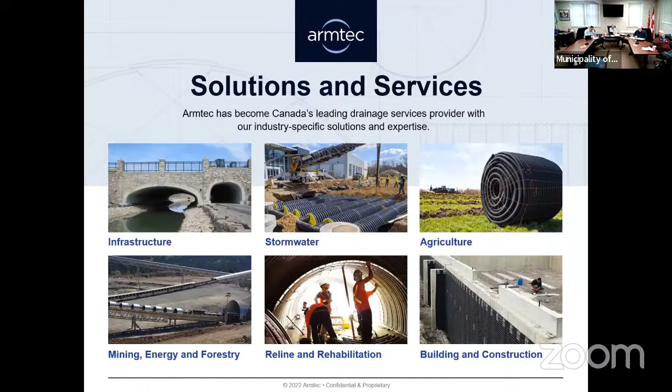So we'll get right into things. I took a look at some of the bridges you've got there. These ones stood out as bridges where maybe we could help with corrugated steel structures, either as replacements or rehabilitating them. There's going to be a couple categories: the rehabilitation side, the new side, both with corrugated steel products, and then we do have a prefabricated steel girder bridge. I'll go through one of those examples near the end. By the way, if you have any questions during this, you can ask.

Okay, so these are the ones, and you can see the spans are not that big, and the ratio of span to rise is such that the rise is not so small compared to the span - it's not like a long, very low bridge. They're ones that are a little bit higher. That's because of the product that we have.

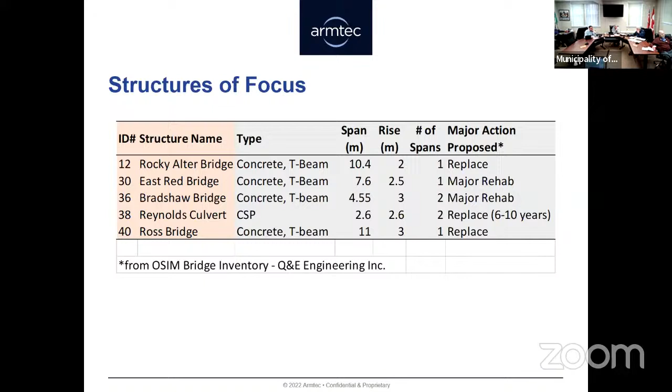So let's get into these products. This product here is called Bridge Plate. It's a corrugated product - basically the steel is corrugated, bent to a certain radius, and holes are put in prior to that. Then these pieces are bolted together to form a shape, and they can be bent to different radii to make different shapes.

So today, I'll mention that later. The different coatings, galvanized to the left and polymer coated to the right, are mainly about design service life. The polymer one is more expensive than the galvanized. The life expectancy depends on the environment, so I would recommend doing water testing at the site - there are different parameters like pH, resistivity, and chlorides that influence how long the structure will last.

Generally, one lasts twice as long, or you'll get a third longer life out of it - out of one versus the other. Our engineering department will design galvanized to last about 75 years, and if I ask them for a polymer coated one, they would do that too, but again it also depends on the site.

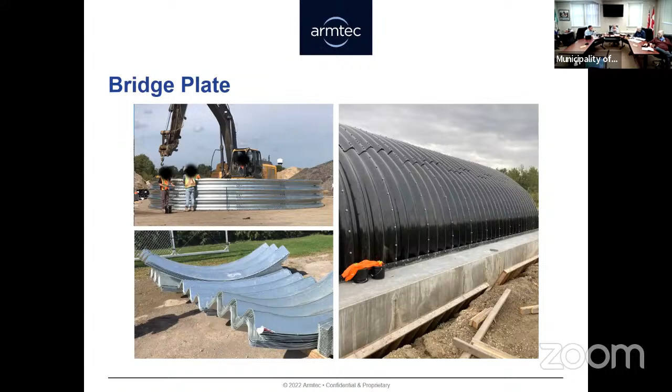This is totally above my head right now, I'm going to be quite honest with you. What does that mean when you say that? Oh, sorry, you know what, jump to the next one there. Sorry.

Galvanized to the left, polymer to the right. And steel - you can see the head wall is perpendicular to the structure, just on the face, and then the wing walls come at an angle. So yeah, steel sheeting, we can design and supply that. I'll show you an example, maybe that exact example later on. So let's go to the next slide.

So we have a number of different corrugated products, but that one I just showed is bridge plate, and it's the largest corrugation that we offer. On the right you can see DCSP and SPCSP - the bottom one is that bridge plate, and the one on top is multi-plate. Those designations are just in the bridge code - bridge plate is deep corrugated structural plate, and multi-plate, which I'm not really suggesting for these ones, but it's a product of a similar nature, under the structural plate corrugated steel pipe category.

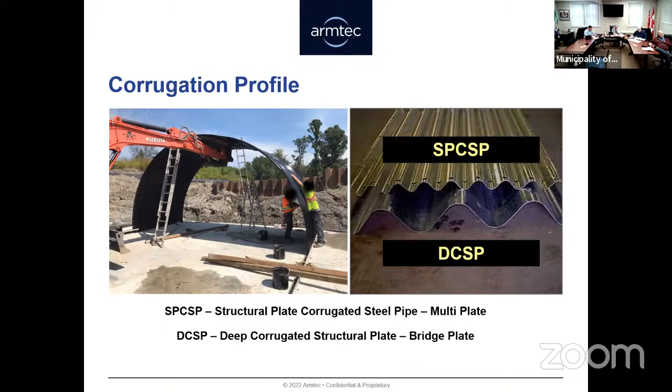And that to the left is an example of an arch in multi-plate. Anyways, let's jump back to bridge plate, the product I'm thinking about for some of these. They come in open bottom structures.

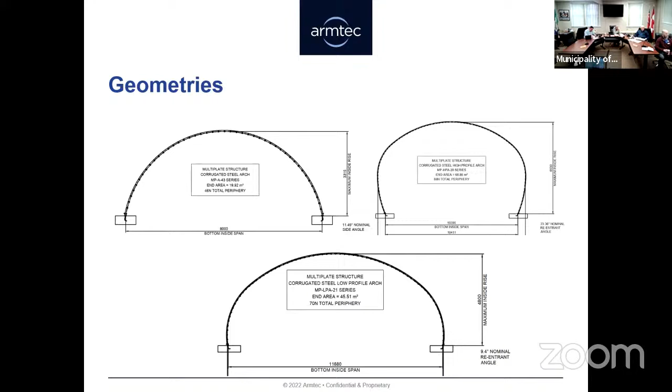So here on the top left is a single radius arch. In the bottom is a 2 radius arch - within the arch there are 2 radiuses - and in the top right there are 3 radiuses. Then there's another one which is the box culvert shape, a lower profile one mimicking corners at the top left and right, so you're going wider with a lower rise.

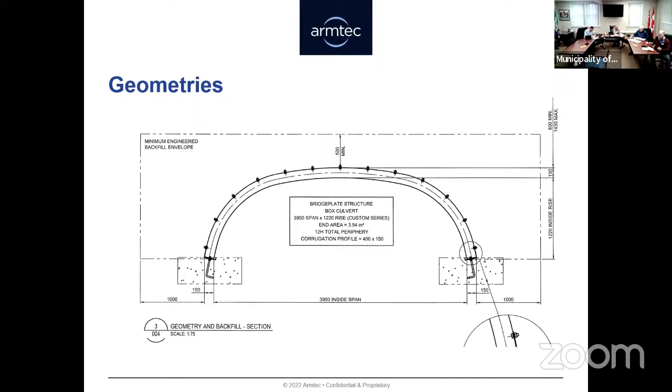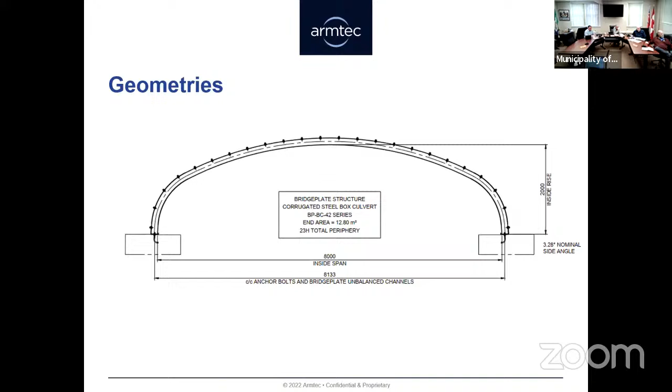So let's take a look at these bridges again. Oh sorry, yeah, where do you want to go forward? Yeah, so that's box culvert to the left versus arch to the right. Then jump to the next screen there. Sorry, I'm thinking I'm controlling it here. That's typically what happens, that's fine.

Okay, so you've got the structure names to the left there, a potential rehabilitation option - I'm not saying it's going to work, but a potential option - and then the existing span and rise. So with a lot of these, what I'm thinking is, okay, you have this structure with this span and this rise on the inside, and what if you put a structure underneath it and put concrete in between our structure and the existing one? It's kind of a strange idea, but that may reduce the cost of doing structural repairs on the soffit underneath your structure, maybe to the beams and stuff.

You'd have to make sure you have adequate foundations, because an arch needs footings. But there's potential to use just the existing footings there. So imagine putting an arch underneath a bridge and concreting it in. The other thing is, you'd still have to do guide rail and barrier repairs up above. So it's probably extending the life of the structure and reducing some repair costs.

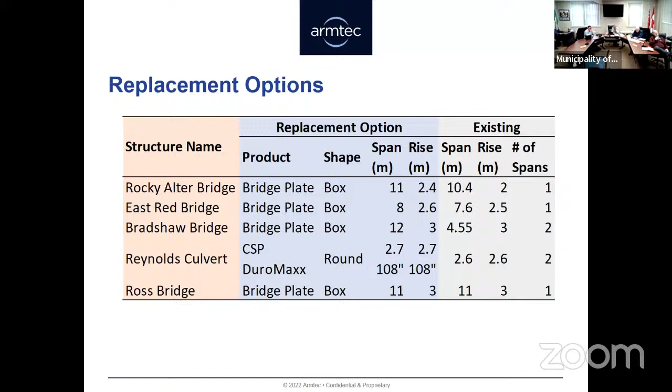Let's look at some footings. If you didn't use the existing ones, potentially we could provide and design precast footings for the foundation. We can design and supply precast. Cast in place we don't do, but we can provide the loadings for a consultant to do. We also do steel footings. But the soil below that and its bearing capacity would be confirmed by others, like a geotech engineer. So there's probably some other involvement there, almost any way you look at it with these, at least the larger ones. So anyway, precast.

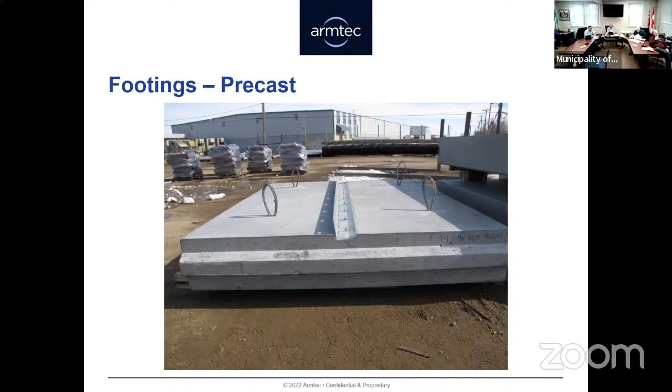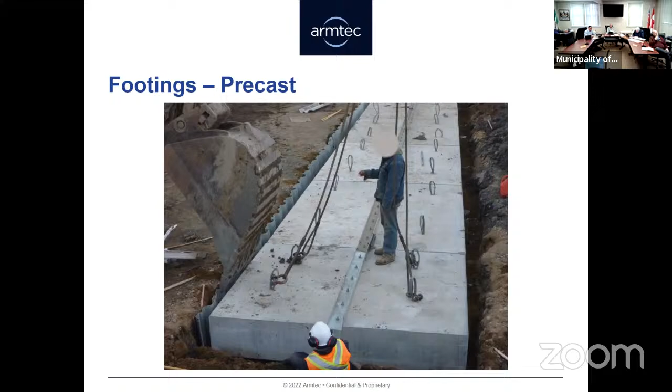So that's for a larger span, maybe 12 meters in span or something bigger. And cast in place, this is out in Banff, maybe about a 16-meter span. So that's maybe about a 12-meter span.

Precast footings, then cast in place footings with some formwork there. So yeah, that's in Banff there.

The head walls there, that's probably, if you've heard of the company RECo, like a precast panel RSS or MSE wall. Anyway, that's an option for a wildlife overpass, and there are two arches there, about 16 meters in span each. We did two of those overpasses.

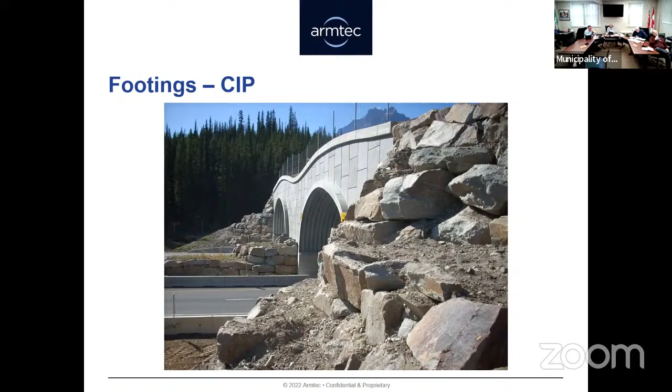And steel, you can see it a bit on the bottom right. So it's corrugated steel that is the footing, but it's not bent to a radius, just flat but corrugated, if you know what I mean. I think there was some concrete poured in there as well. This is a relatively big structure too, maybe around 10, maybe 12 meters. But again, this is if you're using new ones, and potentially you could use existing.

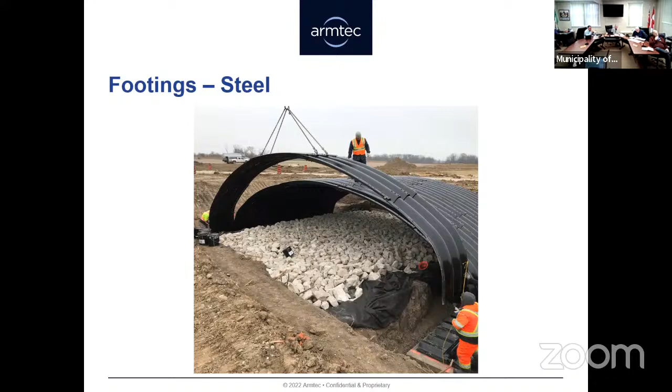End treatments, steel sheeting, I had mentioned that before. That may be a good cost-effective option.

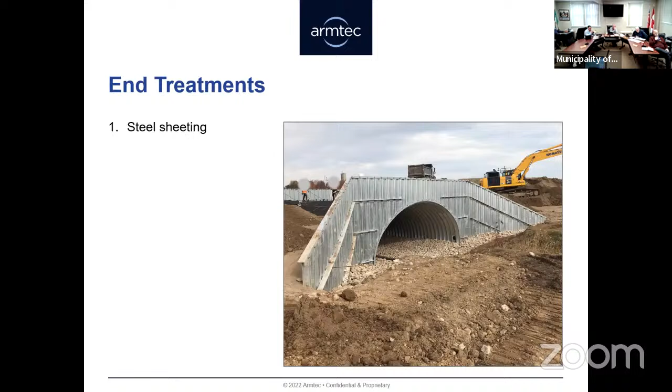Bin wall, so to the left there, not right above the structure but to the left, that's bin wall. Bin wall is like a retaining wall system, or what could be used for abutments. If you had a normal steel girder bridge, you could potentially use these bins. They're steel bins, and you fill them with granular material, and they could be used as an abutment, instead of making embankments and stuff. This is like a bin to hold material in place. We can also supply those and design them.

And then like above the structure as the head wall in that one before, yep, that's actually a bridge plate itself, but again flat, just cut to kind of go around that structure.

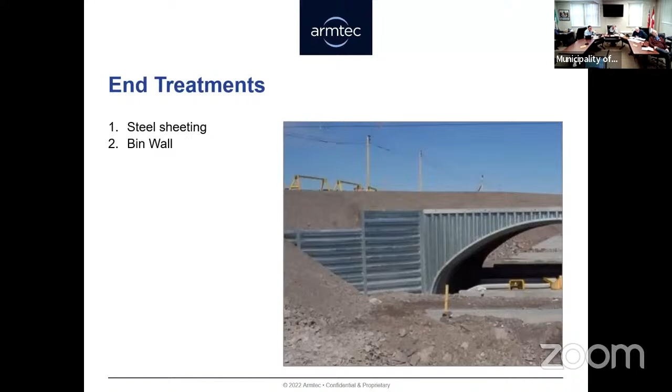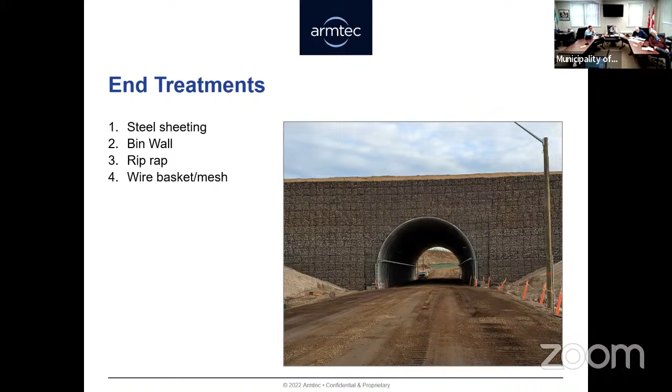So riprap probably wouldn't be used with these bigger structures, unless you want to extend the structure out. It might be a good option in some cases. A wire basket mesh wall, MSE wall - those are like wire baskets filled with stone, and then they have geogrid going back, using the soil or granular material behind the wall to keep it there.

Cast in place concrete - we don't do that, but a consultant could probably do it.

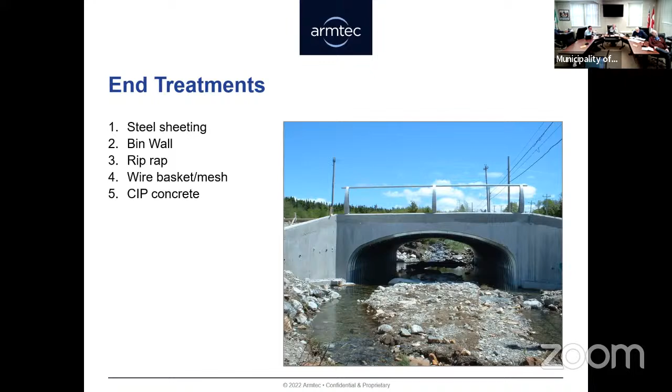Some past projects, now you get to see some of them here. So this one, we've got about a 14-meter span by about 4.8. That is a Rico wall there being used with that structure. This structure is pretty big, a large span like 14 meters, but it's also pretty high. So you can imagine the bridges you're dealing with, probably that's too high. But this is also not a box culvert shape, so a box culvert shape in this span would be lower.

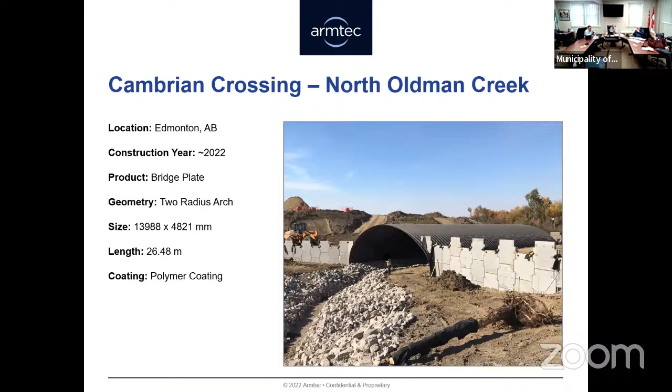Just out of curiosity, could you throw a cost behind that? I could maybe, off the... Sure, sure, okay, yeah no problem, I can pull up some old quotes and stuff. That's good, yeah, just to give us an idea of what we're looking at for some things. Thank you, yeah, no, definitely. Thank you.

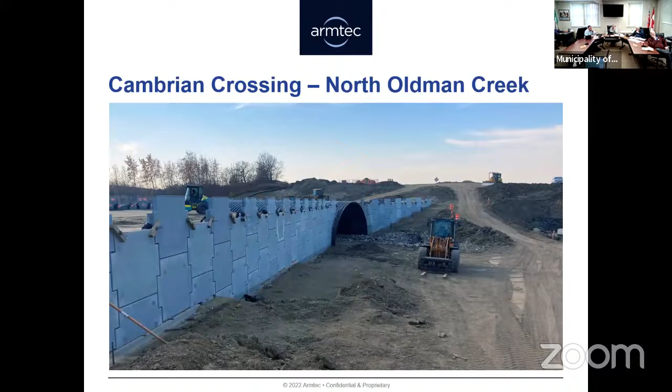You can bump to the next picture there. This was used for actually a water course crossing and a path underneath. Now the path is to the left, and this is in construction.

Okay, so we jump to one with steel sheeting there. You've seen that structure before, I think, in a previous picture or pictures. This one's again not a box culvert shape, but about an 8.8 meter span by 3.6.

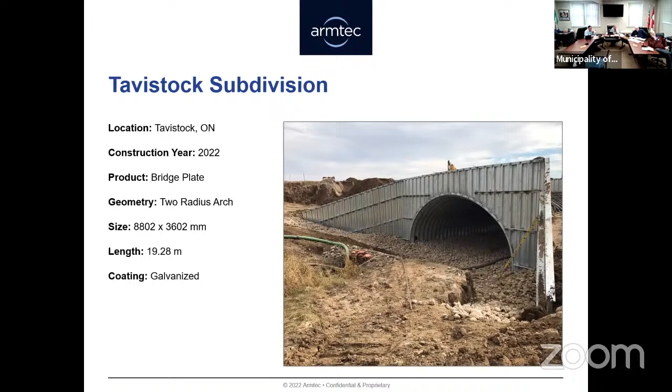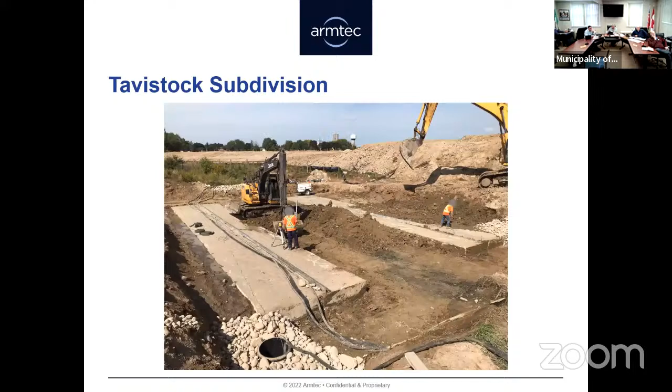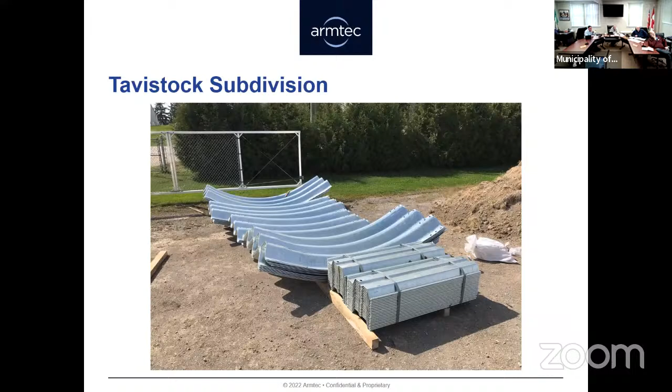You can just jump through those pictures. So the footing there to the right hasn't been poured yet, and now you've got the poured footings in that picture. Here you can see the plate - they're nested pieces nested together. Not the pile right in the foreground, but behind that. And there, you assemble these things.

Usually you start off assembling it kind of on its side, and then you flip it up, just one ring or arch. They come in like 1.2 meter long pieces along the length of the structure. And then after that, you might do piece by piece or ring by ring.

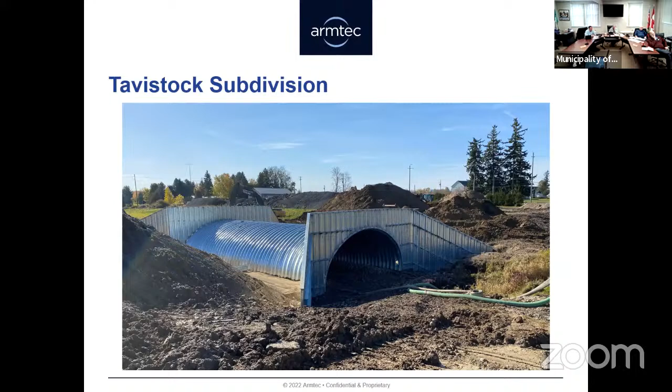But in the case of a reline, you still might assemble one ring and try to slide it in. Or you might actually try to assemble the whole structure nearby and then slide it in. You'd have to think about spacing too and being able to bolt it up and stuff. Okay, so here's another picture. Yeah, we can keep going.

Keep going. And then there are tiebacks from the head wall in this case, going back down to the structure. And then other ones would go into the backfill material as well, into what we call a deadman.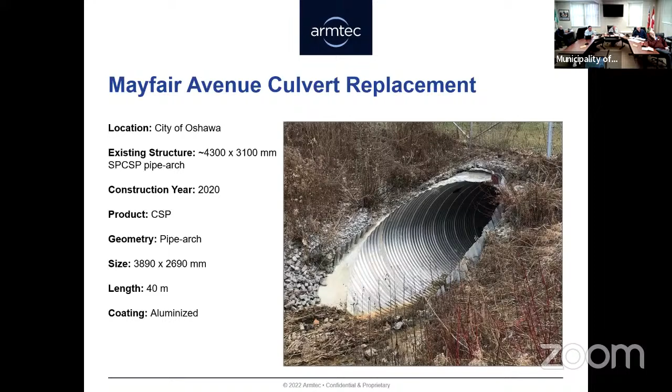So let's jump through those pictures. There's the reline pipe part of it before it went in. There's the existing one. And there's inside the reline, so you can see how you fit it in there.

One of the concerns you mentioned before is that sometimes it shrinks the capacity of the pipe, but it doesn't look like it shrinks it that much. I'm not sure what it was exactly in this case, but we like to see about 100 millimeters - we could probably deal with 75 millimeters clearance between the outside of the reline and the inside of the existing pipe.

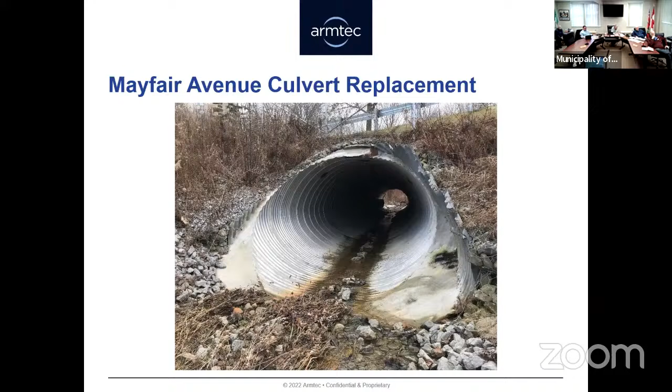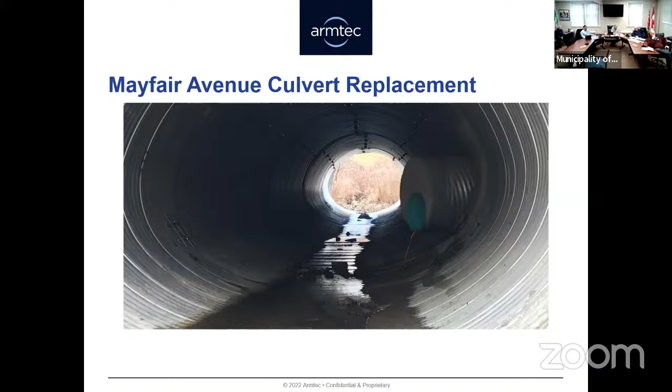Even on the bottom? Yes, even on the bottom. So that one there, you can see in the foreground, the reline, and then the concrete in between, and then a little further back, the existing steel of the previous structure.

So what's the smallest diameter pipe you could work on for a reline? Well, you can do smaller ones, you just don't get in them, I guess. You could go small, maybe even like a 0.8 meter diameter or less, but at that point, with the amount of grout you'd need around it, it might not be worth it. But yeah, relines can be done on smaller pipes, the methodology is just a bit different.

And you grout that with a machine? Yeah, so the contractor can put tubes through in between the reline and existing pipe, and then pump grout through - that's one method. With this structure here, I wasn't there personally, but I think there are grout ports within the reline structure, so you hook up a pipe or your grout hose to the port, and you fill it up in lifts, in levels.

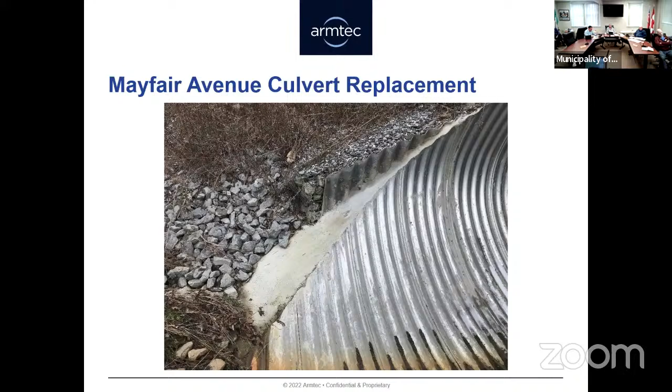That one just shows kind of how we would supply this drawing in our drawing package, and that goes to some of the design that we do.

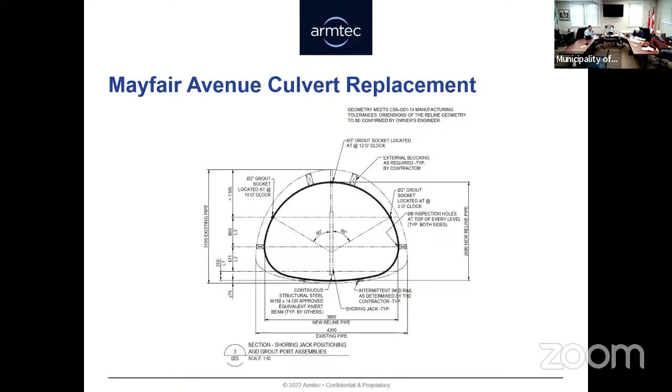This may end up being a more expensive option than what I was talking about before, and you need abutments and stuff. But if your existing abutments are good, maybe the best option is to take out an existing superstructure and use the existing abutments, doing some repair. So in that case, maybe this is a good option.

So this is an example from Saskatchewan - the picture is from Ontario, but the bridge was installed in Saskatchewan. We'll go through some pictures here. It's a steel girder bridge, and we do the design for this. The abutments we wouldn't, but if you remember the bin wall picture I showed previously, we could design the bridge, design the bin wall abutments, and potentially even design the concrete bearing slabs sitting within the bins. So we could cover a lot of the engineering, but below the bin wall abutments you probably want a geotech engineer to confirm the foundation and other elements of the project. But we could do a fair amount of it.

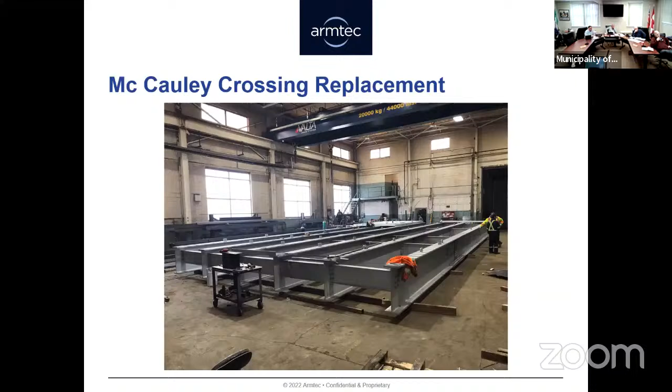Okay, so in this case, about 18 meters long. Let's jump to the next one. In this case, lengthwise, it was spliced and plates were put in there.

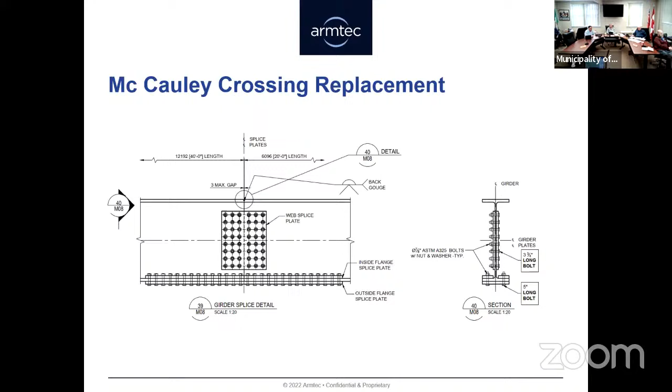But it would come to site - it is modular, it is prefabricated, so it comes in pieces. In this case, this one came in the full 18 meter length in 2 chunks. Why there's a splice there, I think it's actually maybe cheaper to buy smaller beams and put them together instead of buying a big one in this case.

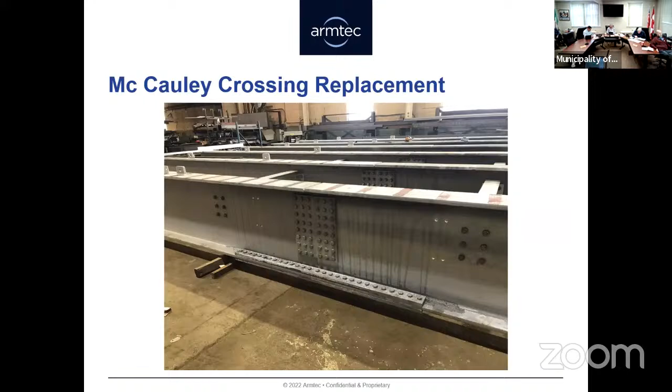Okay, let's go up one, or back - yeah, okay, that's good, there you can see it. Let's jump down one. That's what we call bridge plank - that's the structural decking system that sits on top of the beams, and on top of this would be your running surface, which we could supply if it was timber.

If it was granular, you'd be filling up these corrugations with granular. For asphalt, you'd fill up the corrugations with concrete and then put asphalt on top. So there's some different options with that.

One of the biggest things that impacts our bridges is the use of salt. Now, is there a coating on any of this stuff so salt doesn't impact it as significantly as a raw material? We would apply this as galvanized or weathering steel, or it could be painted as well. I think we recommend spraying down the bridge maybe once a year or something to get rid of that residue - those would provide some protection, but maintenance is needed. Yeah, the salt is a killer for us.

Just to add to that - Ryan and Trevor are implementing a bridge maintenance program, both in the spring and the fall, to help us have a better handle on that. So that's a good move on their part. And maybe consider using an alternate to salt potentially - that might help too.

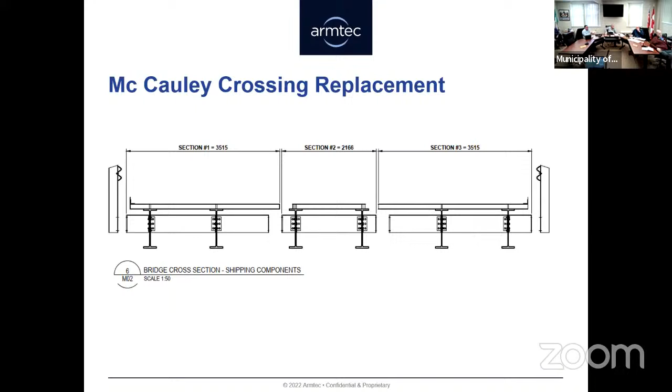Okay, let's go to the next picture there. Next one - okay, so here you can see the width of the bridge. In this case, it was brought in 3 sections widthwise, and lengthwise it's the full length of the bridge. So 3 sections total. Let's jump to the next picture.

And then the beams are connected through these diaphragms - I guess they're the pieces in the picture going left to right. And then also you have the decking on top. Let's jump to the next one.

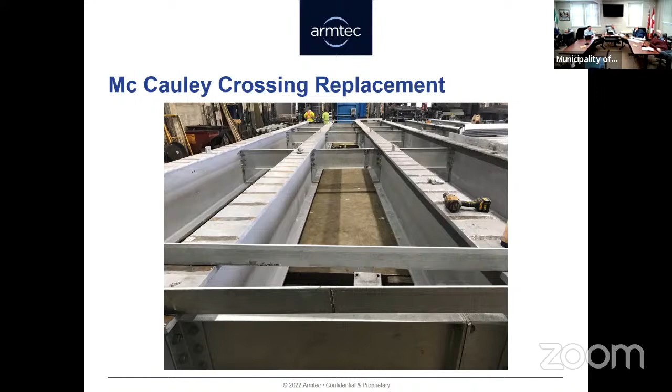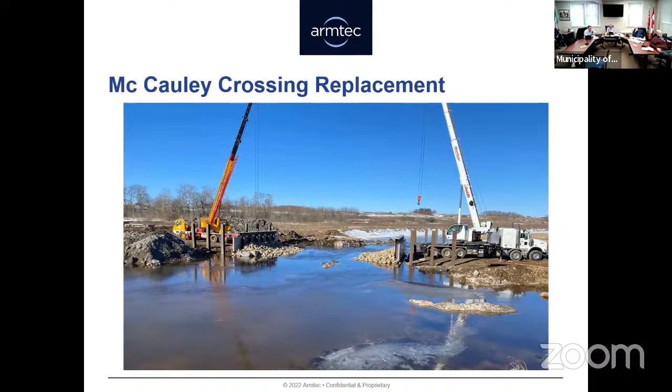So there's a truck with one of the pieces. Next picture - here you've got some cranes, and basically things are prepared such that you can put the bridge there. So you've got, I believe in this case, steel piles. Maybe there's a zoomed in picture later. Let's jump to the next one.

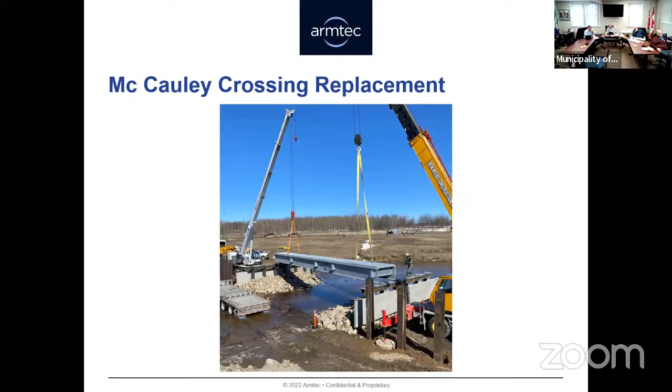And so, yeah, they're going to put this one in. Let's jump to the next picture - so they're craning that guy in. Next one - now they've got their second one coming in and their third one coming in. There we go.

Let's jump to the next one. So putting the actual bridge on, if the abutments are ready, could take like a day. If you're putting the running surface on as well, maybe add another day or two to put the granular or asphalt on top. But the approaches are not done in this case, so that's work as well. The bridge itself, putting it on, is relatively straightforward.

In this case, I don't see a barrier system, but we can supply them with barrier systems like a W-beam guide rail, and that can come pre-assembled as well. So you'll see a piece, and on one side there's the barrier system.

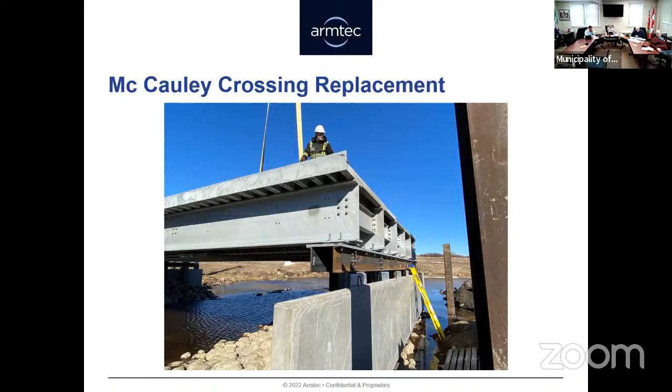Yep, so we supply everything down to the elastomeric bearing pad, that black piece there, and also span-wise up to and including the expansion joint, if there is one. There might be a little bit of welding required between the beam and the bearing plate, but again it can probably take within that day to install.

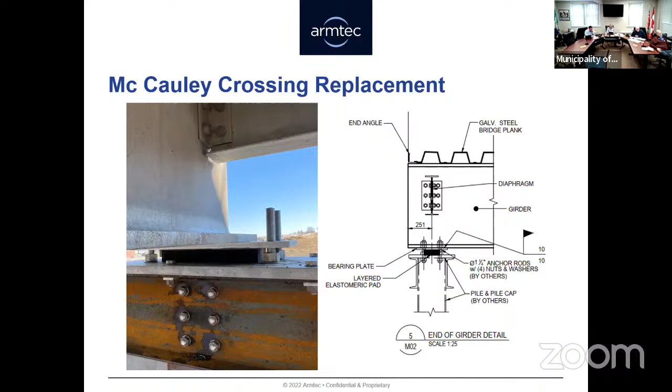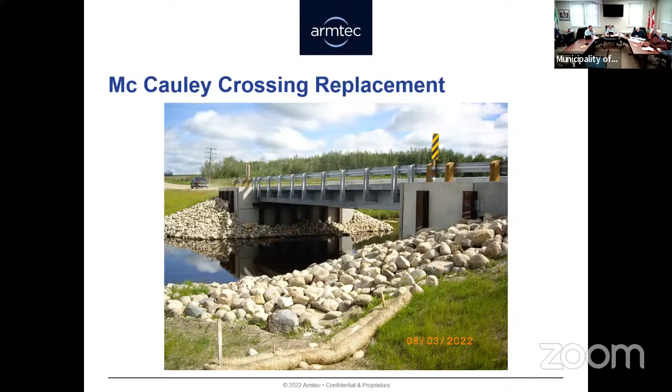And there's a picture of basically the finished bridge. There's more to know about that bridge, but it at least gives you an introduction. We'll jump to the next slide, pretty much done here.

Councillor: What's the longest span you could do for that application? Speaker: I think 24.3 meters. Councillor: Yeah, I think that maybe works out to 80 feet. How many feet? 80 feet. Councillor: Oh yeah, okay, thank you.

And it's not like it comes in at 80 foot, 60 foot, it's customizable within our maximum and minimum, maybe not to the centimeter, but it's customizable. Councillor: So there's no way you could do 160 foot and do a live joint in the middle? They don't do that? Speaker: We haven't done it before. It's possible, again maybe a consultant would have to get involved, and the engineering would probably be the biggest part of that.

And we are under this Canoe procurement group. Canoe is partnered with AMO via the local authority services. So basically we're a supplier for their Canoe culvert program, which I think includes the bridge plate product I showed before, maybe even the bridge in box as well. I'm not sure about that, but basically they've done the tendering process already, and we have won that tender.

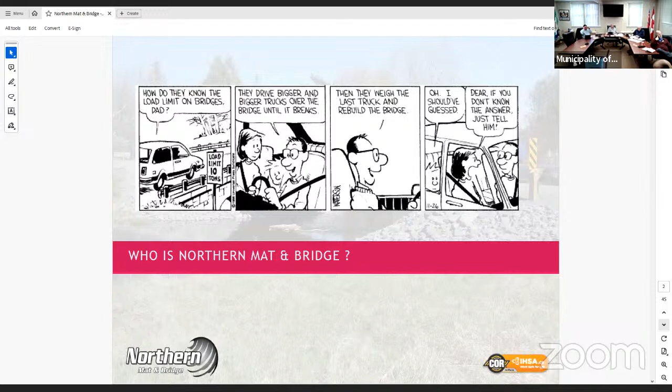So all of these are turnkey services, and you see the one that's highlighted with the dash line - that's permanent municipal bridges.

Our head office is in Calgary. Our Eastern Canada operations are out of Orangeville. We have in excess of 500 employees. We've been around for, well, the current iteration, I think for Northern Mat Bridge, has been around for 10 years. Before it was referred to as Northern Bridge and Mat - just some name changes. We are a wholly Canadian owned company that only deals with Canadian products.

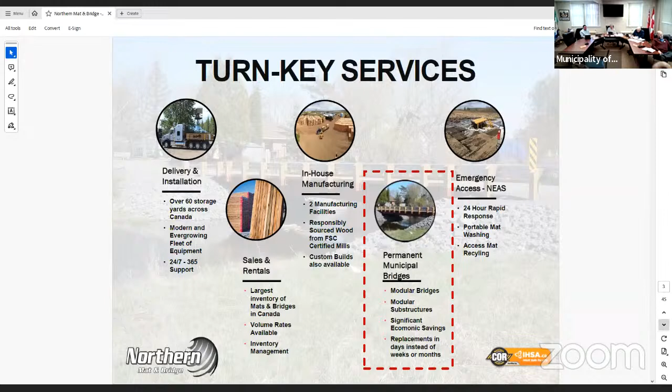We have the highest health and safety and environmental accreditation that's available in Canada. It's called COR. I think we went over it earlier last year - we went over 1 million hours without an incident or an accident.

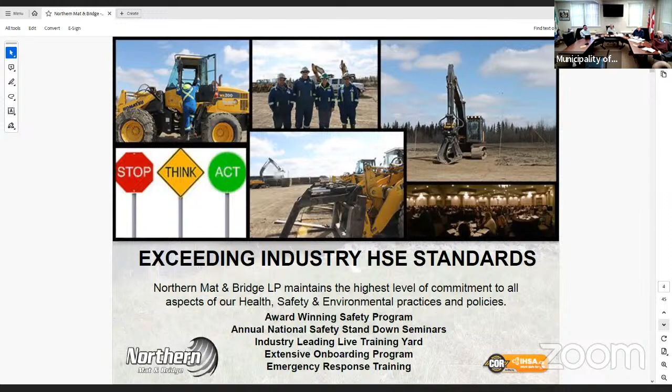We care about the communities that we work in, and this is a prime example. We have joint ventures with First Nations right across Canada, where the First Nation shares economically in any work that we carry out on their lands. It speaks to reconciliation, and it also speaks to our care about our clients and our recognition of the status of the original First Nations of Canada.

Approximately, if I'm not mistaken, about 130 partnerships across Canada.

Just a quick map showing you Eastern Canada operations - those are all locations that we work out of. The one thing - I'm a fixture of Good Roads, Jim's seen me many times, we talked last year, I'm always available. But the main theme for my presentation today is simple: bridges shouldn't cost millions of dollars. That's the best way to put it.

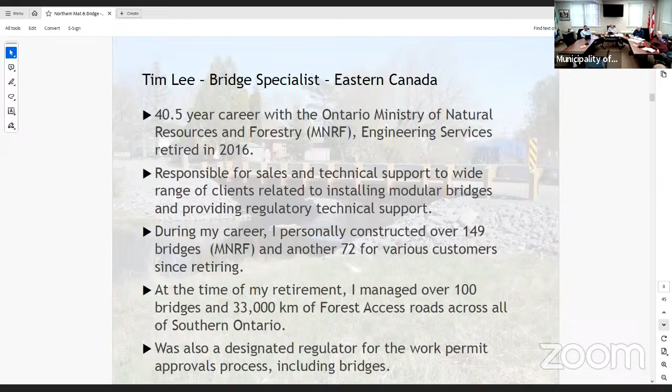So if somebody like an entity, not a municipality - because the municipality was exempted from the work permitting process as long as you stayed within the road right of way - but any group, any individual, snowmobile clubs, forestry bridge applications, when they came in, they went across my desk for my approval, my recommendations, prior to the issuance of the actual work permit.

History lesson - so how do we get here? There's an awful lot of vintage people around here that I think were around when Mike Harris was the premier. So this is your planning cycle right now. We'll start off in the top left corner. You have budget setting, which you just went through. You've got your budget set, it's in place. So let's say you did have in your budget a bridge replacement for this year.

By April, you would have a signed contract with an engineering firm to carry out that bridge replacement. They go off, they do their own thing, and there's no contact from that technical assignment. In between there, you've got new inspections, which would be a different contract - the guys are out looking to see what additional issues are with your structures. Then you come up to the application deadline for grants, and you're calling the engineer up because nobody's talked to him, whether it's Jewel, whether it's Greer Galloway or whatever. No, there's been no discussion whatsoever.

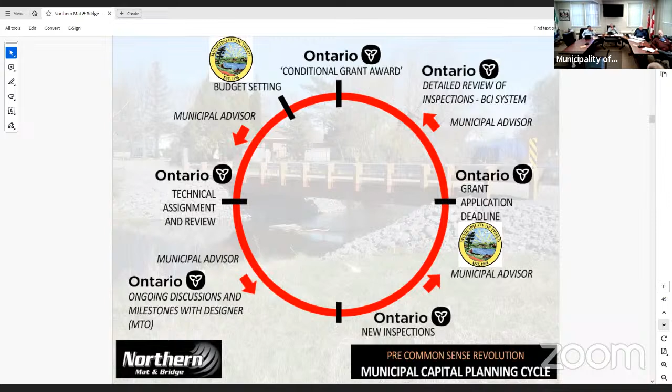Next slide. Go ahead. Okay, so I just have a quick question for you.

So, correct me if I'm wrong. If we say Northern Mat was successful with a tender, just throwing that out there, in the past we'd deal with, and I think Jim's probably told you, all of a sudden an EA study comes up that's not good, or the flow test with the Conservation Authority isn't adequate. So the minute you are engaged, that goes away with us, you look after all that. Yeah, that's what we get to now. I know what the CA is looking at because I was looking at the same thing when I was with MNRF. If it's a private individual, a group, a cottage association, or turn the clock back to prior to 2008, municipalities, we want to make sure there's an adequate opening underneath.

The 149 bridges that I did with the ministry were all in extremely environmentally sensitive areas, not urban. 14 out of the 19 bridges in Algonquin Provincial Park, I installed. You get a sense why it's a provincial park—there's something very sensitive there that we're trying to maintain.

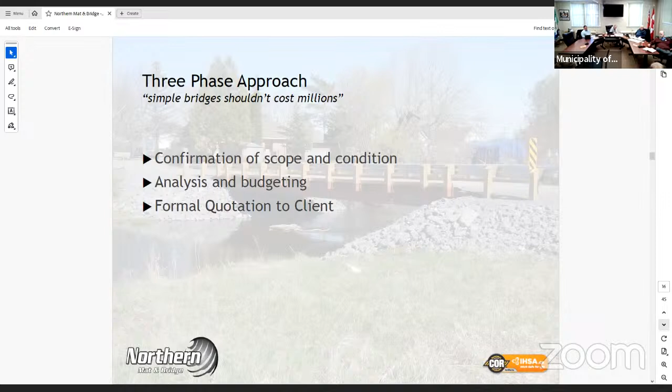So we go formal quote to client, and that's the price we'll do it for, and it will be less. I guarantee you it will be less, because when we do the budget there's a whole bunch of unknowns that we don't know about. I use my experience and several tools I've developed over the last 40 years that allow me to get into the market number. The quote will come back.

The quote from our standpoint, some municipalities enter into a formal contract with us. Other municipalities just sign the quote. Whatever you feel comfortable with.

The other thing that goes with the quoting system is that there is no outlay by the municipality. You sign the quote, you agree to the terms, and it's all laid out and documented in the project plan, which is developed as part of the quote.

The milestones are, hey, when the bridge is ready to go, you pay for it, the bridge gets delivered, construction starts. We're talking about a time frame of a week, maybe at most 7 or 8 days until we're all said and done, and that's when the final invoice would be issued.

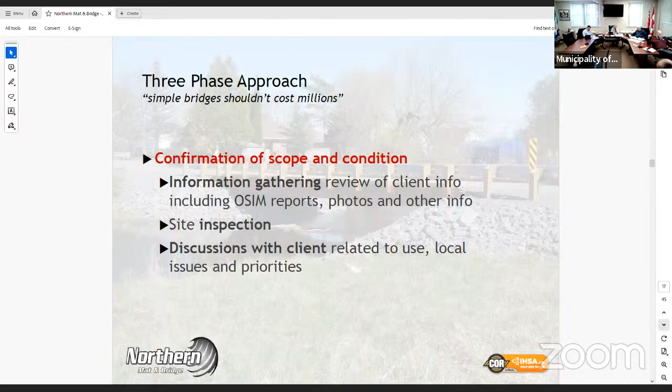Analysis and budgeting, detailed analysis, as I've already covered, existing conditions and why they occurred. If somebody did something, it sounds pretty simple, but it gets overlooked all the time, which is somebody did something 30 years ago and it didn't work. So why would you want to redo it?

You have to be able to separate that out and understand what forces were at play, what actions have to be taken, waterway conditions, environmental issues, access for construction. I can tell you the places I put bridges in, a lot of people would think twice about ever driving into those places, and I was going in there with 49-ton excavators and tractor trailers.

Budget estimate, follow-up discussion with client. Next slide. Formal quotations, we just got through there.

What we do to go from the budget to the quote is we simplify it as much as possible, we don't make it more difficult. The roster of contractors and engineers I work with understand that. We don't try to add little details that we know are going to cost money, like metal curbs with drain pipes attached to the deck because we think there's going to be a water issue. That's out the window. It's basic, it's safe, and it's efficient.

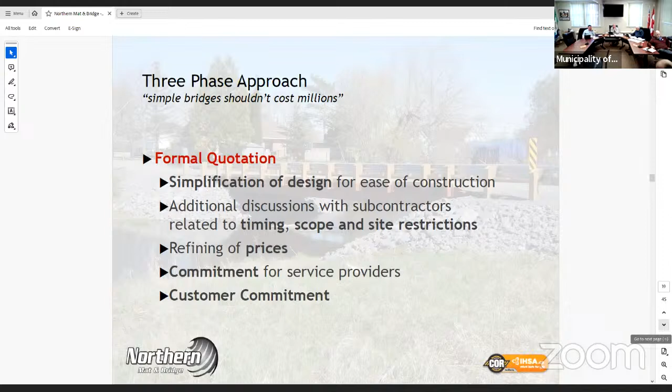Go to the next slide.

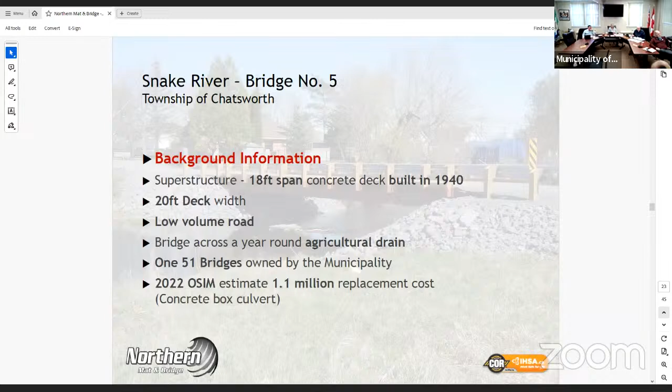Yeah, I think we kind of skipped ahead. Just go back a couple. Yeah, one more. And I think that's it.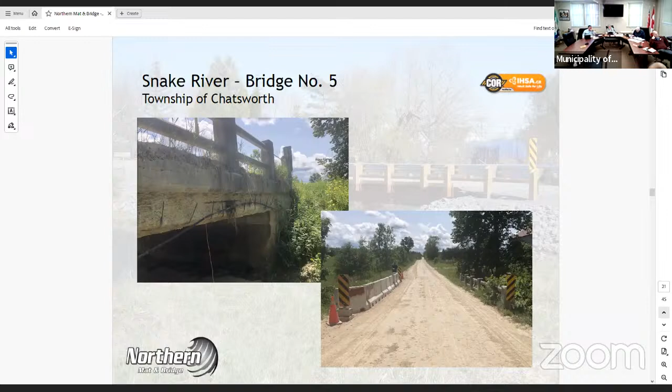So you can see the condition of the bridge, right? The guy's telephone line hanging from the side of it. The barriers consisted of cast-in-place, ornamental stuff that the Department of Public Works would have done in 1940. The other side had no barrier, so they had Jersey barriers for the last three years.

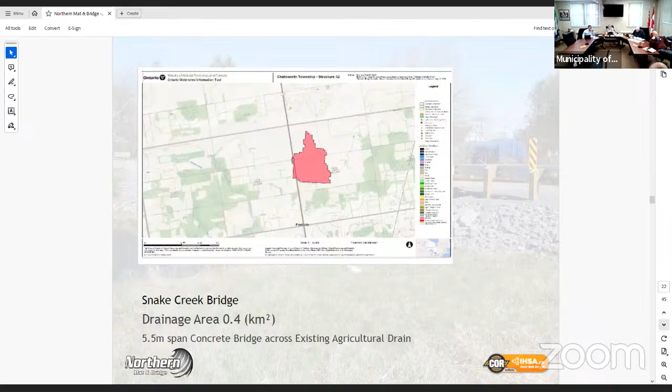Very small drainage area, it's like 0.4 square kilometers. Next slide.

That's what they ended up with, right there, and I have much better photos than that. But they ended up with, and that was everything all in - the environmental approvals, the EA, the engineering, the bridge. A 20-foot wide deck on it. That's the precast concrete abutments, that's what we use. The precast concrete abutments are basically a meter wide, half meter deep, and whatever the width of your bridge is, plus a couple inches on each end.

Basically the way it works is we start Monday morning at 8 o'clock. We take out everything that's been scheduled to be taken out of the way, and we have equipment on both sides doing that. There's no in-water work. Just go to another slide... so it's 281,000, that's what they end up with. You can see the old abutment underneath the far end of the bridge there, with the new bridge sitting on top of it. By Wednesday, the bridge was in place on top of the abutments.

Yes, go ahead, Councilor Bellika. So just looking at the picture, the old abutments are there, but you said you put in new abutments on the backside of those? Backside of them, okay, thank you.

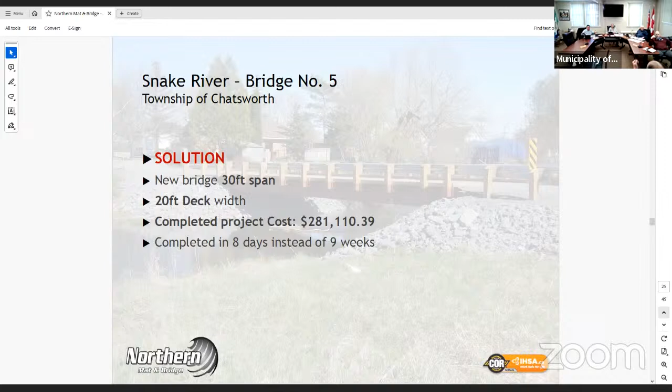Sorry, did you want to say? Just trying to figure out your concept here, sorry if I sound kind of... So instead of using the abutments, what you're doing - you're taking an 18-foot bridge, making it 30, and using the road itself as... No, the concrete abutment sits underneath the end of the bridge. It has to be there to fully support the end of the bridge and transfer that dynamic load from the truck and the weight of the bridge into it. It's a meter by half a meter, and it actually sits on 8 inches of compacted granular A material with a geotextile, compacted to 100% standard Proctor density, which is just like this desk, right, in its integrity.

And like I said, there's no in-water work. We could do a bridge right now if you wanted to, because we're not going to be near the water, we're not going to interfere with the water whatsoever. If you start to get into putting piles in, driving sheet piles, de-watering, depending on whether it's a cold water or warm water fishery, there's timing restrictions—you can't work in the water when that stuff is on. Well, the stuff we're doing here, 365 days a year.

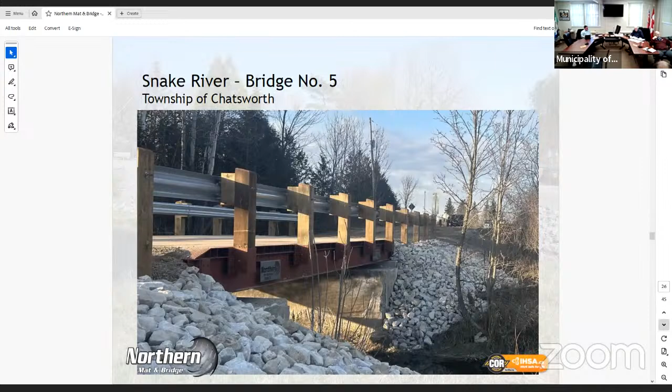Next slide. Councilor Flitter? We'll check on our guests. Go ahead—so if the abutments are deemed good, safe by the engineer, then we're all set to go? Well, what I would say is, it would be...

There would be circumstances where you would use them again. Typically the kind of wear and tear we see is ultraviolet, sand, salt, wear, temperature changes, over 50, 60 years—I know I've changed over 50, 60 years. But the disintegration, like the bridge that I showed, the Snake Creek Bridge, the side that still looked like the barriers were good—well, if we all spent 15 minutes and stayed at each one of those posts, we could peel it right apart. There was no integrity left. We couldn't actually pull them out; we cut them and tried, but as soon as you put a chain on them, they just disintegrated.

So this one is up the road from you guys. This is in Madoc, right? Centre Hastings. So this one was a 2-span structure, as you can see there with the center pier.

In 2017, it was put out to tender. The engineering firm—a name you'd all recognize, which I'm not going to say—their idea was, we're going to beef it up, increase the size of the center pier, put new concrete on the front, anchor that new concrete into the back and a bunch of other work, and put a steel stringer bridge with a wooden deck on top of it. The lowest price came in at over $900,000. The municipality said, no, we're not doing it.

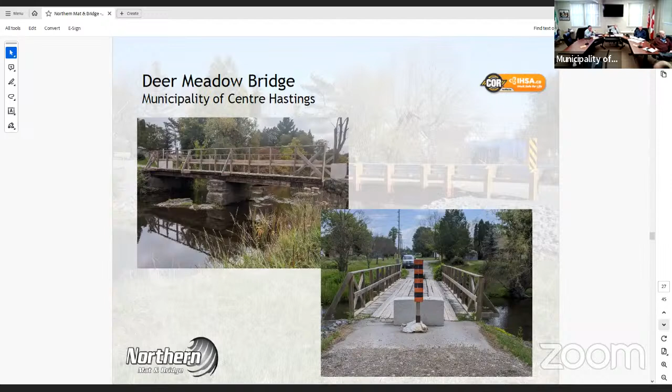Much larger area, 74 kilometers, compared to the one I talked about previously, 0.4 kilometers. This is 74, a big area, and 26.1 cubic meters per second would go under that bridge in a flood.

So 2 spans, 18-foot spans each, 16-foot deck width, near the pool and park. When I saw exactly how bad the bridge was, all I could think of was the parade of minivans going in and out every summer to swim lessons, pool parties, baseball tournaments and stuff.

One of the things going back to the OSIMs we encountered was nobody ever said anywhere in those OSIMs that the actual steel beams were stitch welded together. The beams had pieces of checker plate, all different sizes, stitch welded just to one side. There was nothing on the other side. And they had little Mickey Mouse pieces that looked like light railway rail bolted to the bottom of it.

For the consultant originally to have said we're going to put more meat behind here, at the far corner of the bridge, there was actually a concrete block, not laid like it would normally be used in a building, but on its side, to support that end of the bridge. And a propane truck had gone across there 10 days earlier.

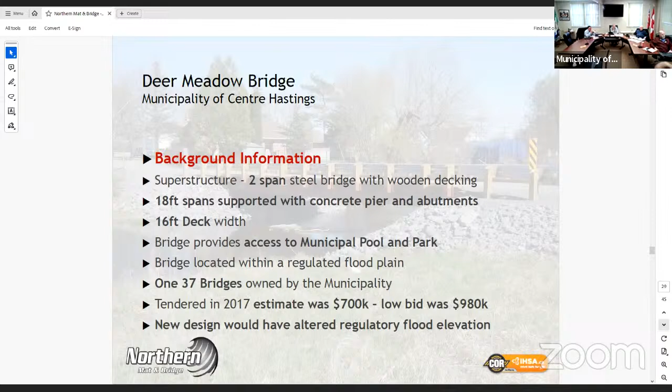So the solution was a 60-foot clear span. Again, we're going back farther, getting into some meat that can actually support the bridge, with a 16-foot deck width. They did it for $221,000 total.

They saved so much money, and if you don't believe me, call Alex Kelly and ask him, because they had budgeted that year for a brand new snowplow. They saved so much money on this bridge that they got authorization to buy 2 snowplows instead.

It was originally going to be around $322,000. But I also have another model for how this can be done.

There's the one where we do everything from start to finish - we have you out there, we show you, we keep you posted, we give you updates, everything. And there's another model, like for Centre Hastings, where they have a water sewer work crew and a roads crew.

So the other model I use is you have standing offers for equipment, standing offers for granular materials, where the licensed operators will sell it to you for 10, 15, 20% less, but they'd sell it to me working for you. So why don't you just buy it directly and have it delivered to the site?

They provided labor to actually do the physical work - connecting the post pockets, connecting the bridge. They arranged for the crane and paid for the crane, so there was no overhead or markup on our part.

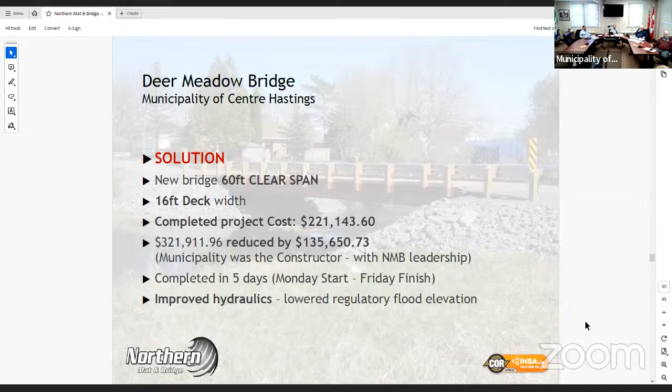Can we speed this along? Yeah, we're running- there's what they ended up with. Right there. Okay, next one.

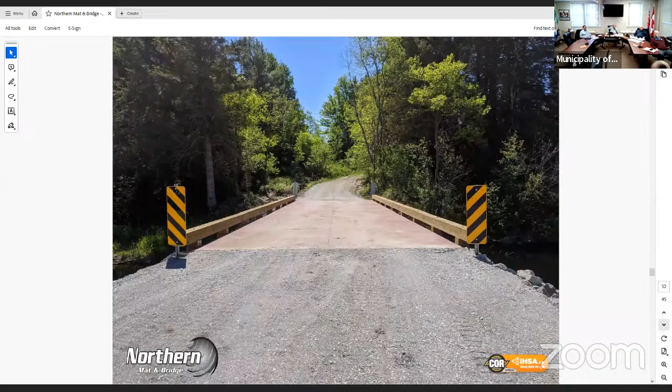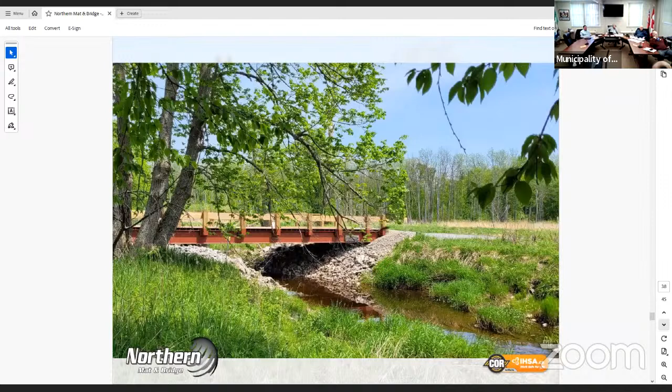So just to really quickly summarize, there's the existing bridge. Like I said, we know now that it's constricting the flow, it's backing up water, it's hydraulically not very efficient. It's subject to issues when it comes to spring runoff, and it's closed or load posted.

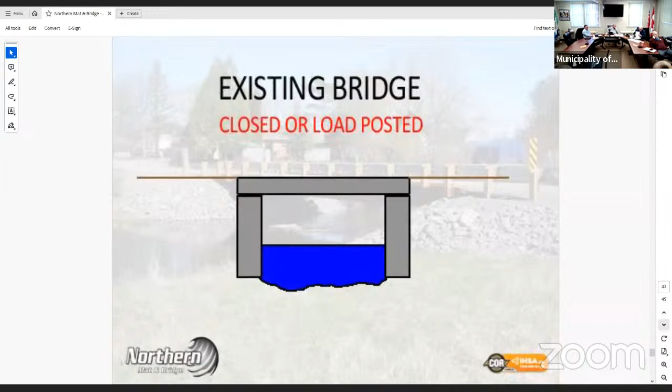Next slide. So there's the box culvert, people throw that around - hey, I just put this box culvert in there, like I already gave you the example for Quinte. There's timing restrictions, permit restrictions, DFO approval, construction costs. You still got to do the removals because everything's got to come out of there, including the abutments, the cofferdam, dewatering, bedding and compaction, because the soil substrate underneath the channel, if it's mud, it's a big deal. If there's at least any granular material with it, it's a little easier, but it's very complex and expensive to install.

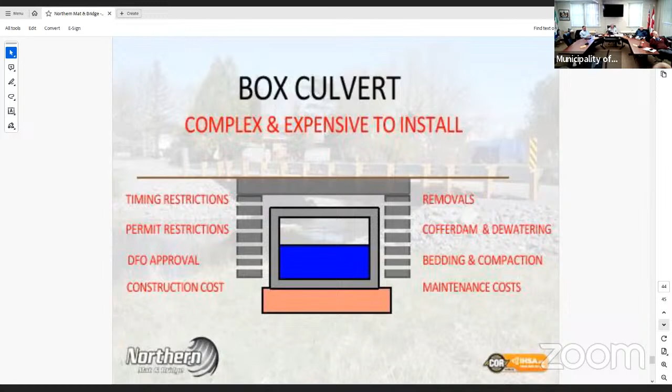Last slide. That's what we're talking about right there. Very simple. We're talking about a bridge that's good for 75 years. You'll probably be in your final term then, Jim. I think he'll still be going. I know I'll be in the nursing home.

Any questions? Actually, no, very interesting. Thank you very much. I really appreciate your coming here and providing us with some incredibly interesting options. And I don't want to take away anything from what any other competitor said, but we are the only ones that do the whole shebang from start to finish. And we understand the difficulties of the municipality, your restrictions, your limitations, all of that stuff.

You will find with us, unlike some of our competitors who weren't here, quite frankly, they will gladly talk to you as soon as you give them the PO, and they'll talk to you as much as you want up until the bridge is delivered or whatever the product is you're buying. And after that, sorry, can get back to you, or no response. We're in it for the long haul.

That's why I like the venue for Good Roads, because I know you guys have other really complex, difficult issues that you're wrestling with. It's not like somebody can show up with a suitcase full of bridges and say, hey, I'd like to talk to Don about bridges. Well, Don's busy working on something else, far more. Good Roads, and I encourage you to come see me, is a great venue because all that stuff's out of your head. You just want to talk to people, talk to vendors, network, whatever.